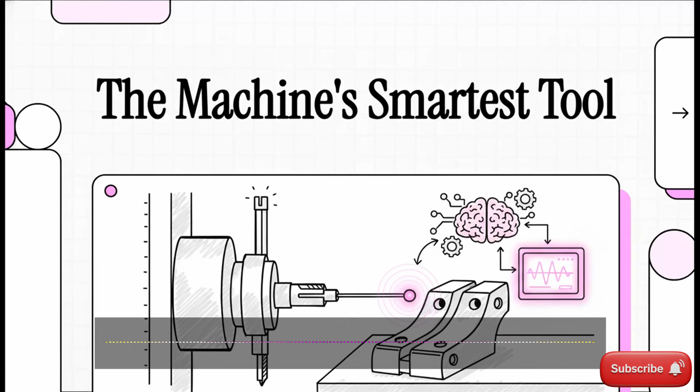Have you ever wished your massive, powerful CNC machine could have a more delicate sense of touch? Well, believe it or not, it can. Today we're diving into a piece of tech that's a total game changer, and it's the secret to making perfect parts every single time.

Oh, we've all been there, right? You pull a part off the machine, it looks amazing, feels perfect. You've poured hours of your time into programming, setting it up, and letting it run. But then you take it over to inspection, and your heart sinks. It's out of spec, it's scrap. And that feeling, it's way more than just frustrating, it's incredibly expensive. I'm talking wasted material, wasted machine time, and wasted labor. It's this hidden cost that just eats away at your bottom line, one bad part at a time.

But what if you could stop that from ever happening again? What if your machine could actually check its own work in real time before a mistake even has a chance to ruin the part? Well, it can. Let's get into the solution.

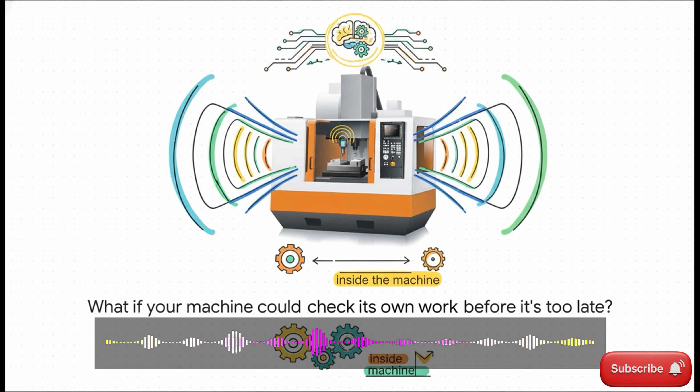The answer is actually right there, inside the machine itself. See, the solution isn't adding another inspection step way down the line. It's about making the machine smarter, giving it the ability to feel and measure while the part is still locked in place.

So what are we talking about here? It's called an on-machine probe. And at its core, it's a super-sensitive, hyper-accurate sensor. Think of it as a special tool the machine uses not to cut, but to touch. It physically makes contact with the part to measure it and check its position all by itself.

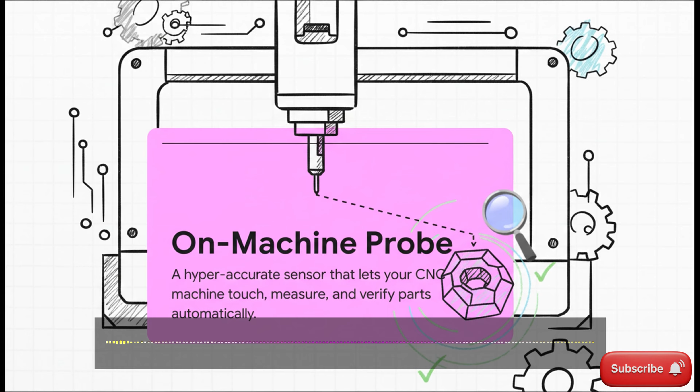Probably the best way to picture it is with a couple of simple ideas. It's kind of like a blind man's cane, gently tapping around to find the edges and build a perfect mental map of its surroundings. Or you could think of it as a smart finger, one that can feel a surface with a level of precision thousands of times better than our own.

Okay, now I know this might sound complicated, but the process is actually surprisingly simple. There's no dark magic here. We can break down exactly how a probe works into 3 easy phases: setup, touch, and go. Let's walk through it. That really all boils down to these 3 steps.

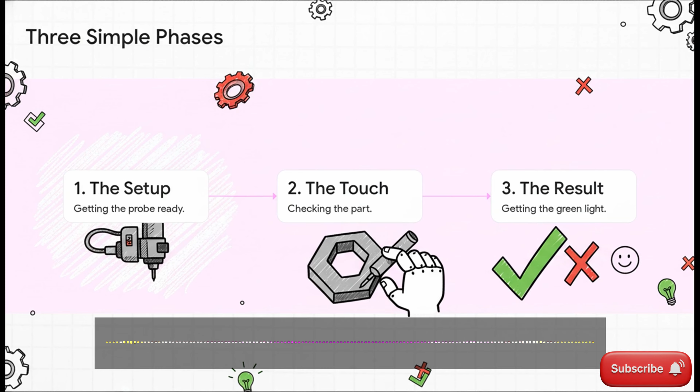First, you get the probe ready. That's the setup. Second, the machine uses that probe to actually check the parts. We'll call that the touch. And finally, the machine gets a clear yes or no answer. That's the result. Let's break them down one by one.

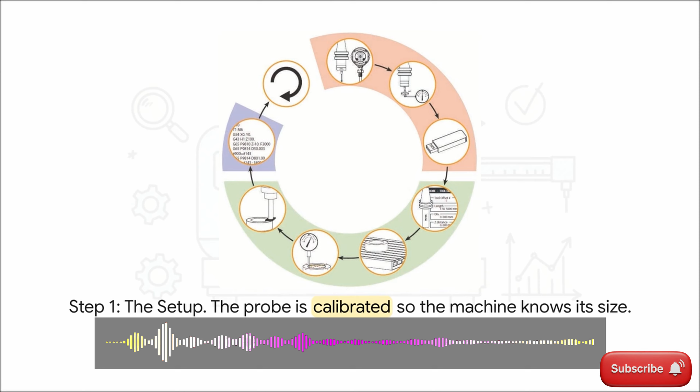Step 1, the setup. Before you can measure anything accurately, you've got to calibrate your tool, right? The machine uses a known reference point to learn the exact size of the probe's little tip and its precise location. It's just like zeroing out a pair of calipers. It sets the baseline for every single measurement that comes after.

All right, now for the fun part. Step 2, the touch. Once it's calibrated, the machine knows exactly where that probe tip is in space. So now it can move it around to gently touch the part and start gathering that critical information. And here's that fundamental action.

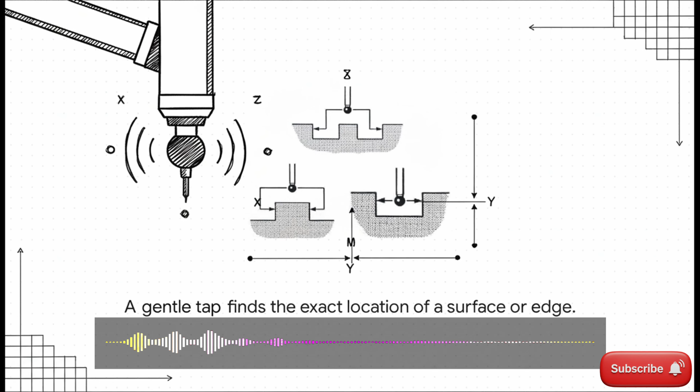The machine brings the probe in for just a gentle little tap against a surface. The instant it makes contact, a signal is sent, and the machine records that exact coordinate, X, Y, or Z. Bam! It has a perfect reference point.

And its power goes way beyond just flat surfaces. Instead of you or an operator having to painstakingly indicate the center of a hole, the machine can do it automatically. It just touches a few points inside the bore, and its software instantly calculates the exact center and diameter, all in a matter of seconds.

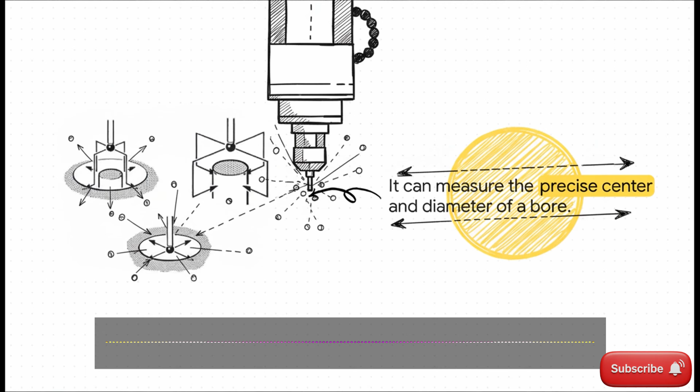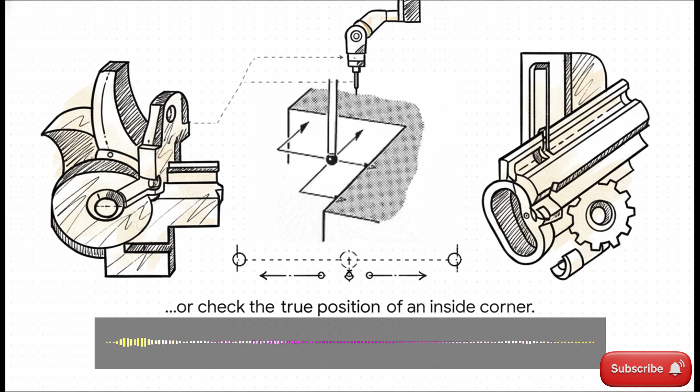And from there, it can check even trickier geometry, like finding the precise intersection of 2 surfaces in an inside corner. Think about how difficult and time-consuming that would be to do by hand. For the probe, it's just another day at the office.

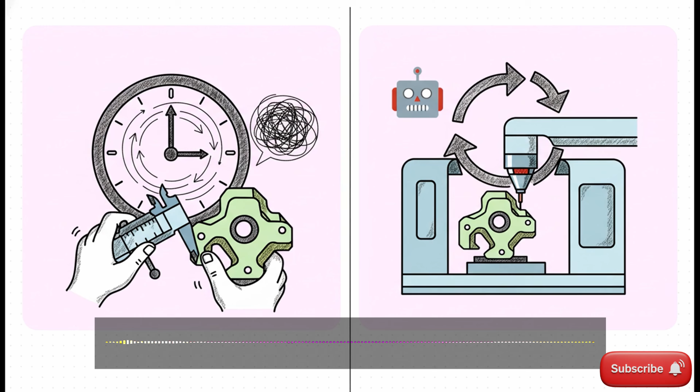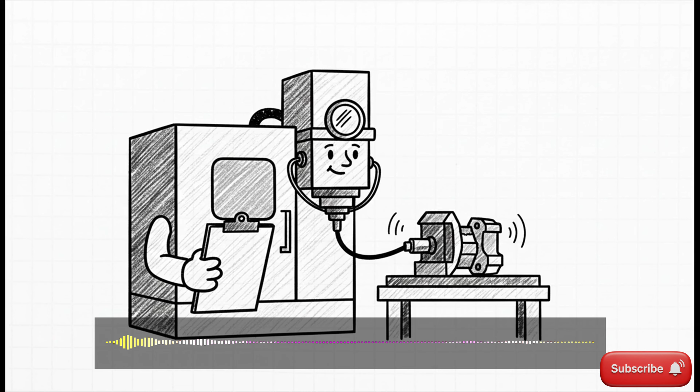Here's one last way to think about it. Using an on-machine probe is basically like giving your machine the power to perform a doctor's checkup on every single part it makes. It's preventative care for your production line, making sure nothing bad ever leaves the building.

So I'll leave you with this question to chew on. What could you build? What could your business achieve if you had a machine that was smart enough to guarantee it never makes a costly mistake again? This is how you unlock things like true lights-out manufacturing, and from there, the possibilities are just incredible.